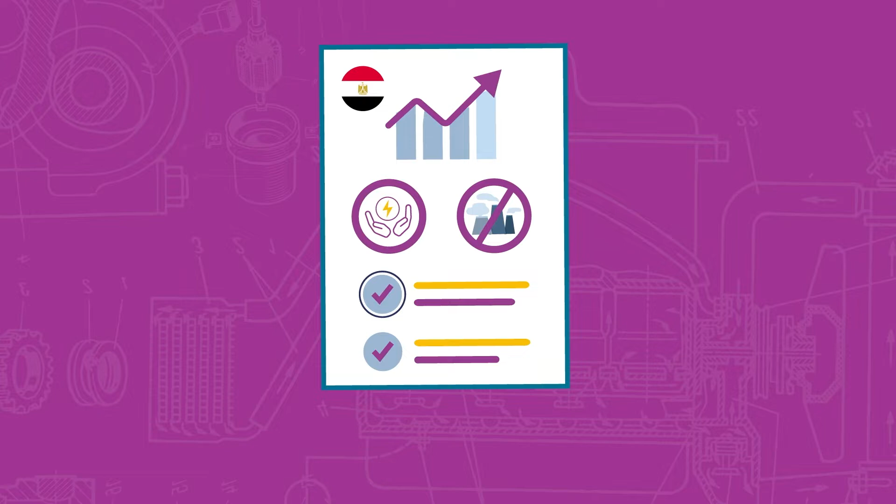Among the actions undertaken was when the Ministry of Trade and Industry issued the Ministerial Decree 463, issued year 2020, for enhancement of electric motors efficiency in industrial operations.

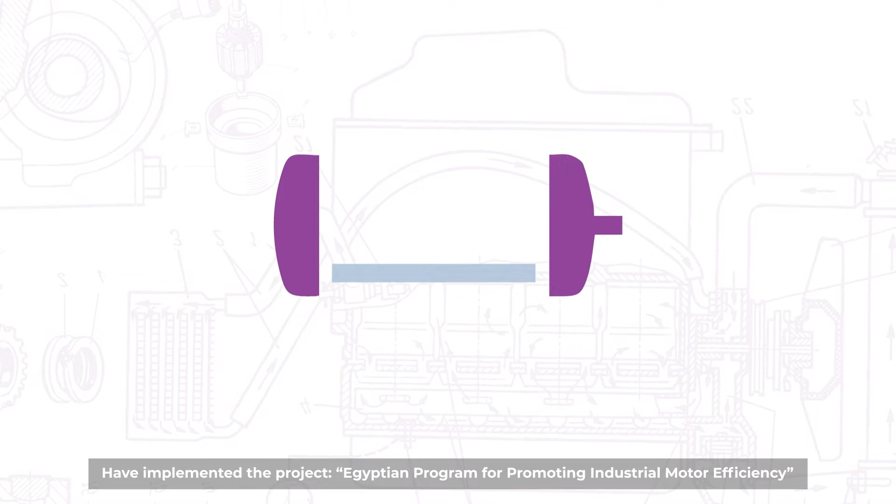Accordingly, the United Nations Industrial Development Organization, in cooperation with the Ministry of Trade and Industry, and with funding from the Global Environment Facility, have implemented the project Egyptian Program for Promoting Industrial Motor Efficiency, which facilitates the relevant decree issued by the Ministry of Trade and Industry and supports the Egyptian policies aiming to mitigate greenhouse gas emissions resulting from inefficient motors used in the industrial processes, especially that electric motor systems account for 70% of industrial electricity consumption worldwide, and enhancing their efficiency would save nearly 4% of the electricity consumption in Egypt.

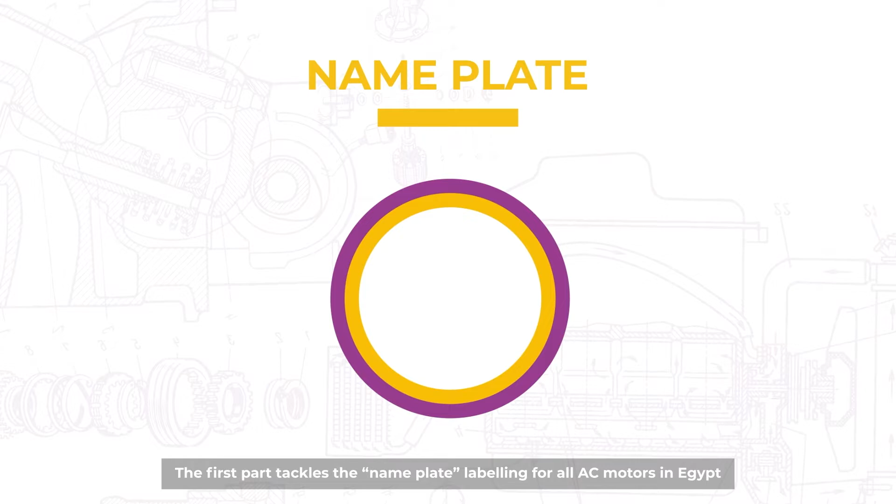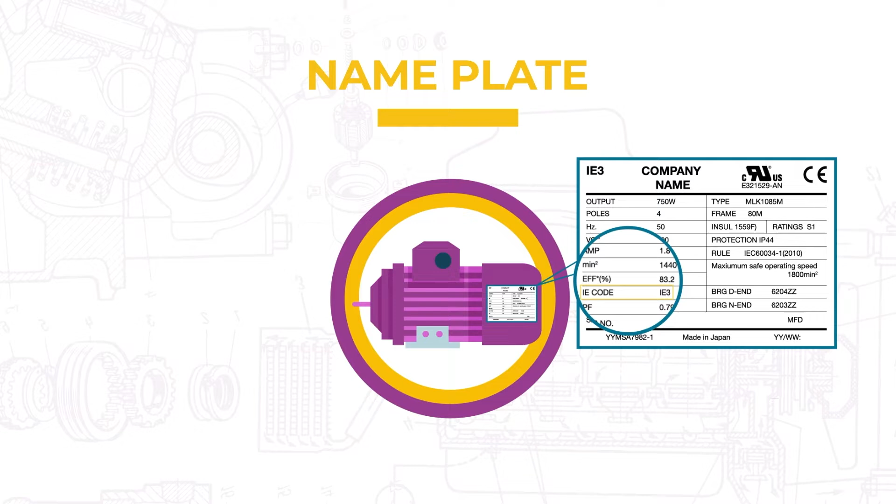The Ministerial Decree 463/2020 includes two segments. The first part tackles the nameplate labeling for all AC motors in Egypt, showing the degree of energy efficiency as per the Energy Efficiency Classification, IE code, and in relevance to the declared tables in the Egyptian standard.

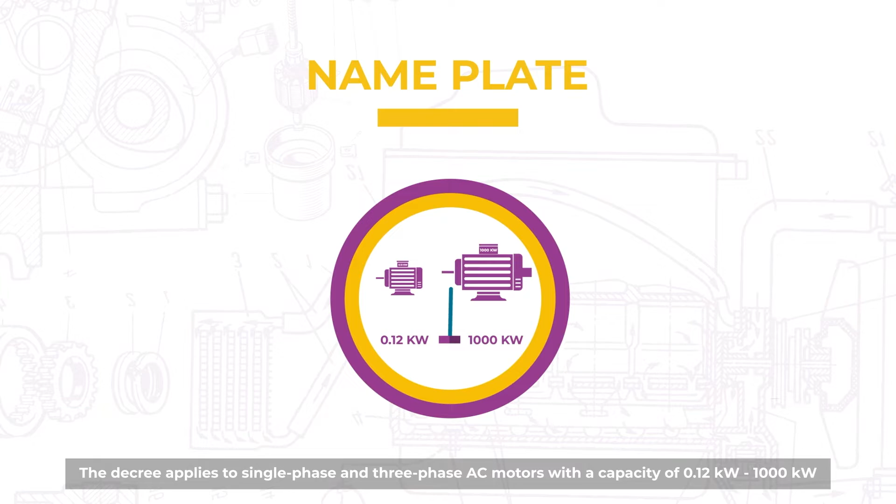The decree applies to single-phase and three-phase AC motors with a capacity of 0.12 kilowatts to 1,000 kilowatts, and with the characteristics specified in the decree, provided that the decree would apply to motors with the mentioned specifications within a maximum period of 6 months, starting the issuance date of the ministerial decree.

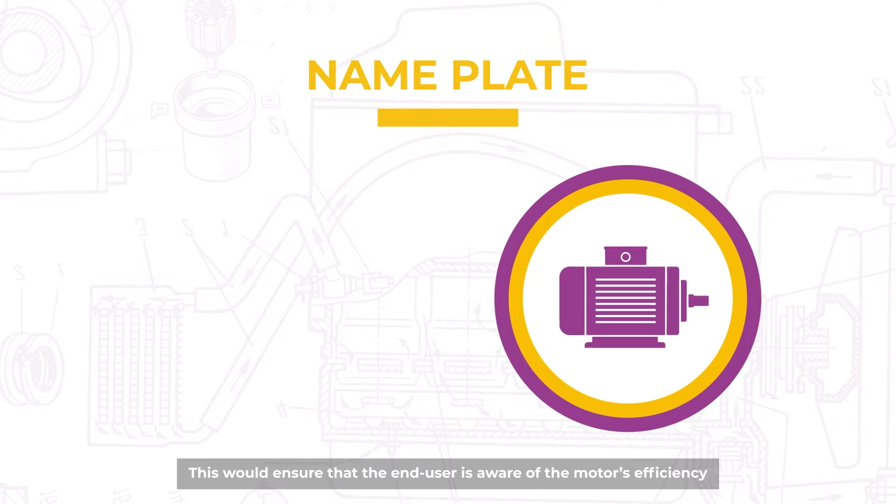This would ensure that the end user is aware of the motor's efficiency and selects the most appropriate motor to achieve the optimal savings in the end user's facility.

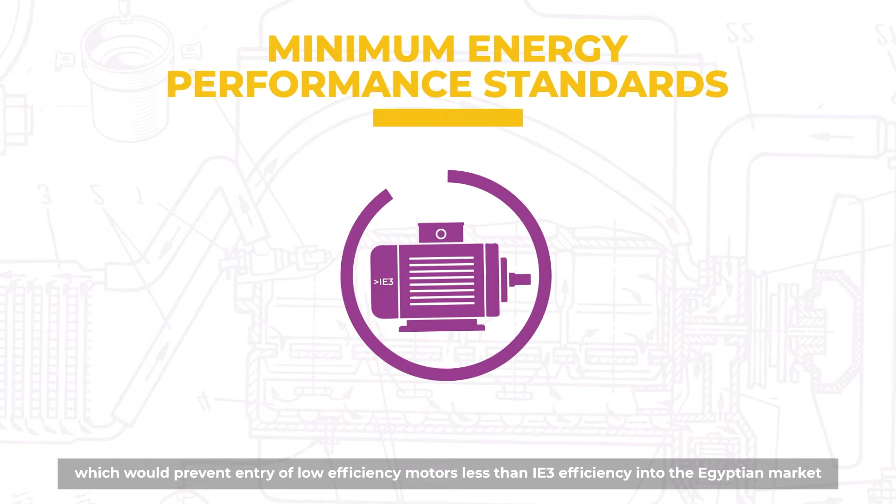The second part of the decree tackles applying the minimum energy performance standards, which would prevent entry of low-efficiency motor, less than IE3 efficiency, into the Egyptian market.

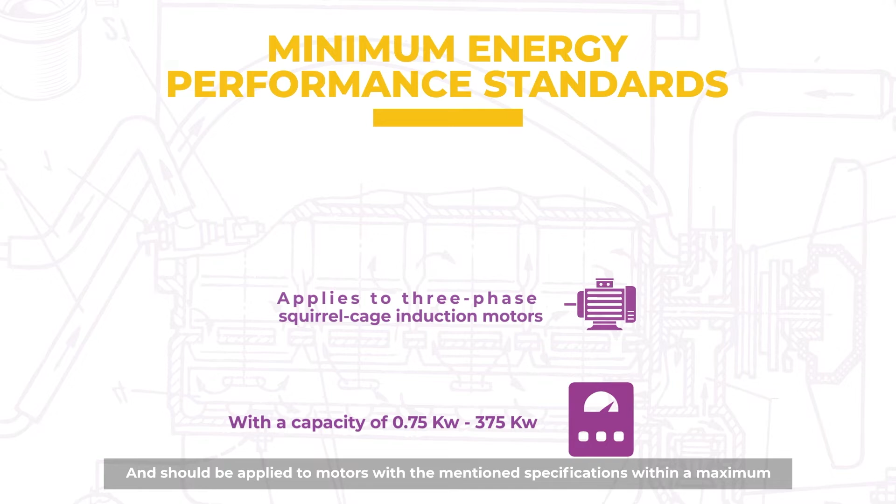The decree applies to three-phase squirrel cage induction motors with a capacity of 0.75 kilowatts to 375 kilowatts, and should be applied to motors with the mentioned specifications within a maximum period of 18 months, starting the issuance date of the ministerial decree.

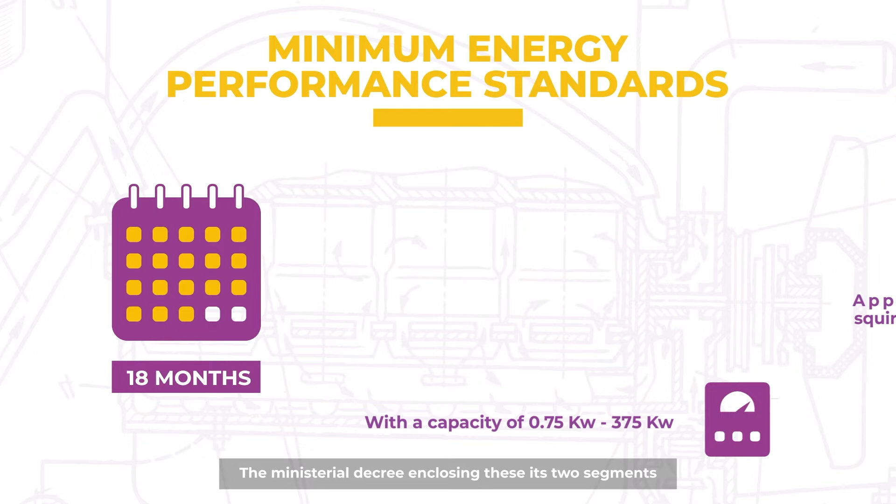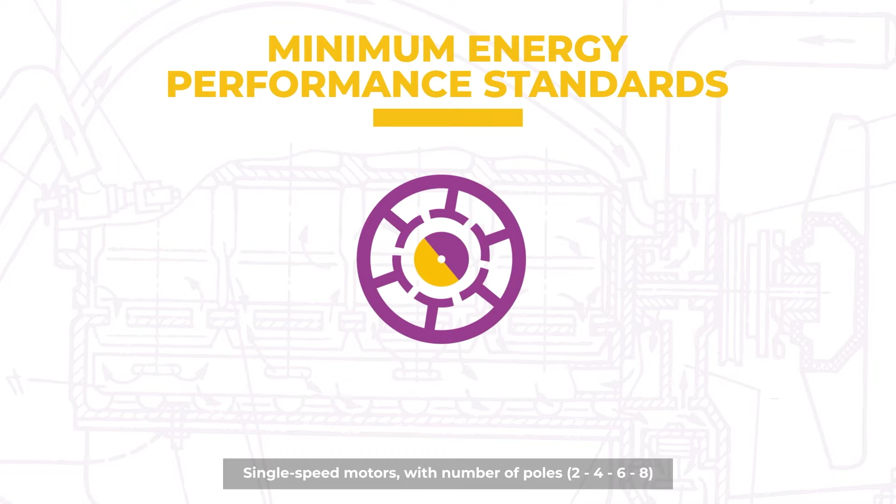The ministerial decree, enclosing these its two segments, applies its provisions on motors with voltage 50 volts to 1,000 volts and frequency 50-60 Hz, single-speed motors with number of poles 2, 4, 6, 8, and duty cycle S1, and direct online operated motors which are not connected to the equipment or machinery. Apart from that, motors are not subject to the provisions of this decree.

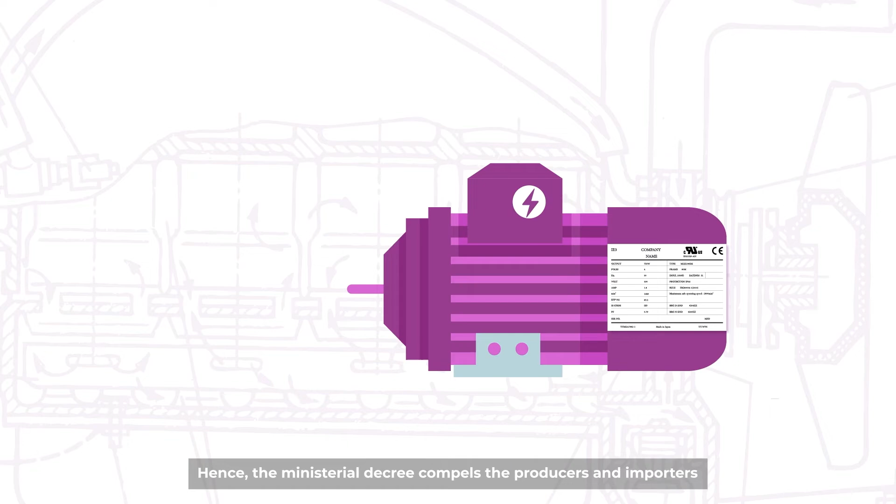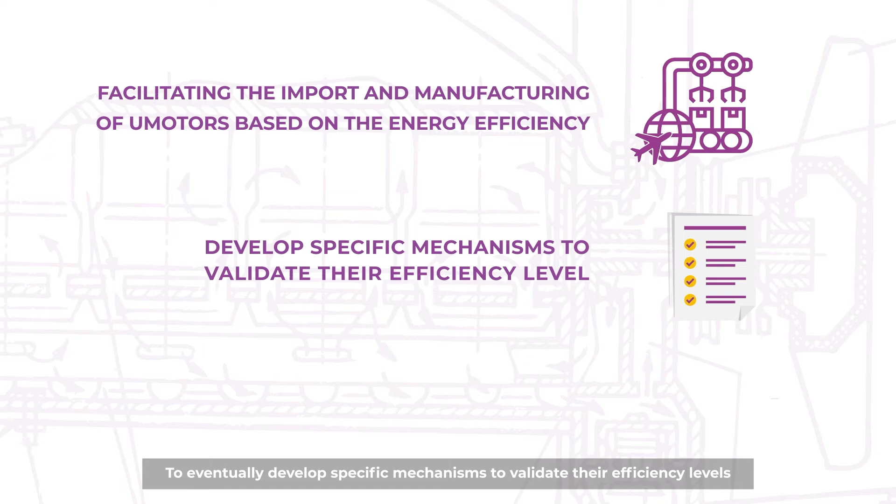Hence, the ministerial decree compels the producers and importers of electric motors to conform to the Egyptian standards, equivalent to that of the international standards for electric motors' energy levels, as well as facilitating the import and manufacturing of motors based on the energy efficiency to eventually develop specific mechanisms to validate their efficiency levels according to the Egyptian standards, or the equivalent accredited certificate emphasizing conformity with the energy efficiency level.

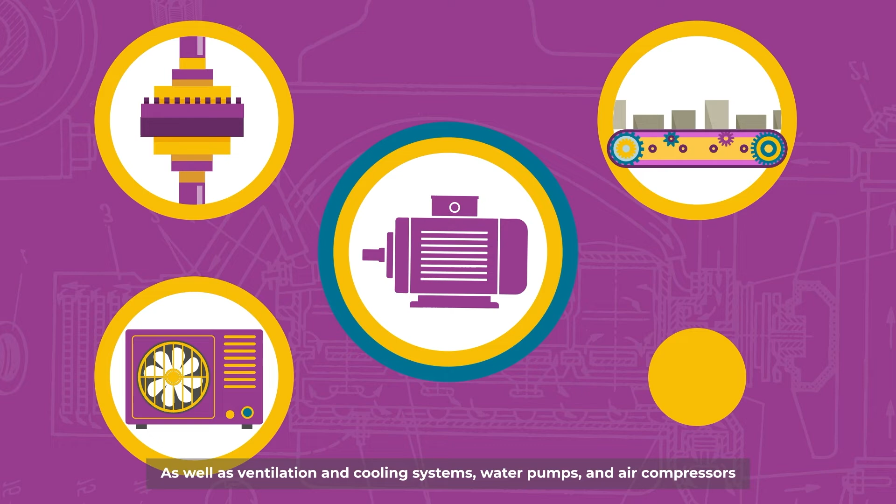Electric motors are used in many manufacturing processes, including compressing and moving materials, as well as ventilation and cooling systems, water pumps, and air compressors. Studies and practical experience show that there are great opportunities for developing energy optimization of electric motor systems, whether in developed or developing countries.

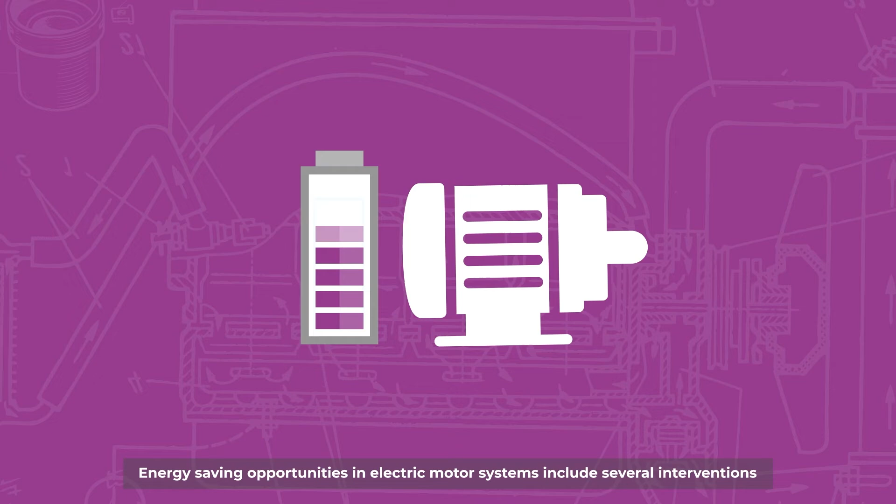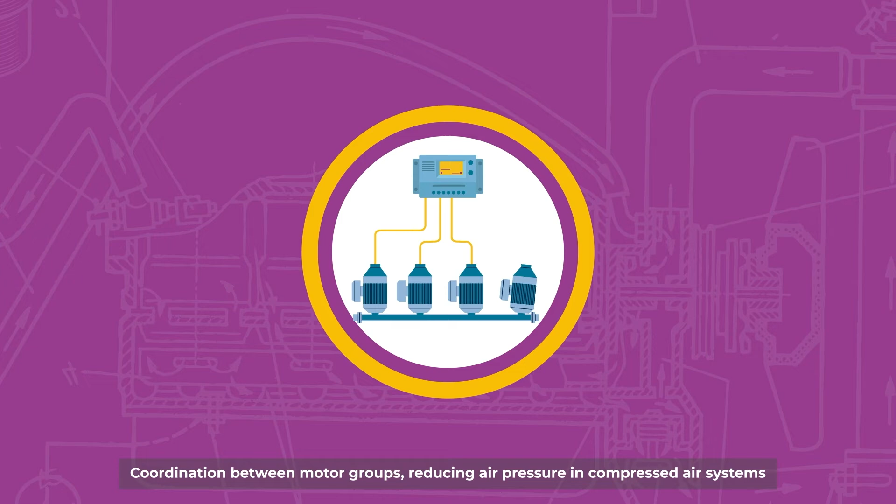Energy-saving opportunities in electric motor systems include several interventions, including optimizing coupling elements, maintaining a balanced voltage source, coordination between motor groups, reducing air pressure in compressed air systems, practicing good rewinding practices, using variable speed drives, proper motor sizing, and using high-efficiency motors.

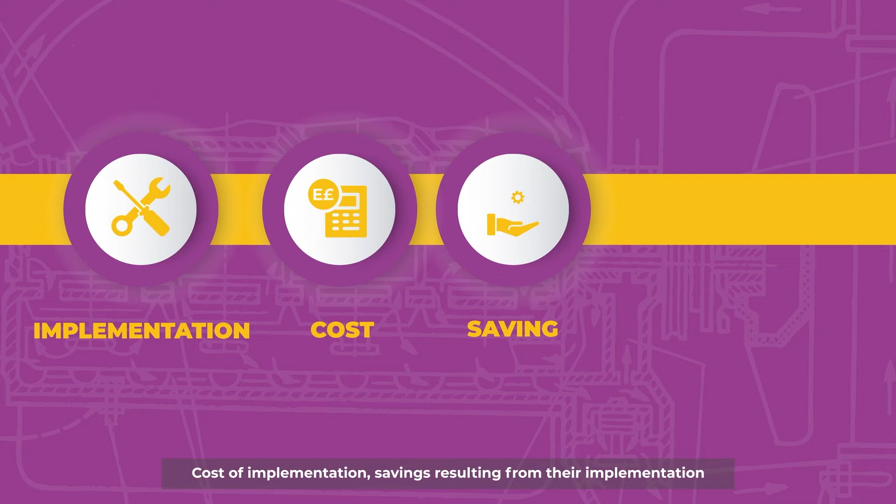These interventions are evaluated by different measures, such as ease of implementation, cost of implementation, savings resulting from their implementation, in addition to their prevalence in industrial facilities. The International Energy Agency

estimates the available savings in electric motor systems in the industrial sector to range between 20 to 30% of the consumed electricity, which could reduce global demand for electric energy by 10%.

However, from a realistic perspective, the International Energy Agency proposes a more achievable target for the International Action Plan, which is to improve electric motor systems optimization by 10% to 15%.

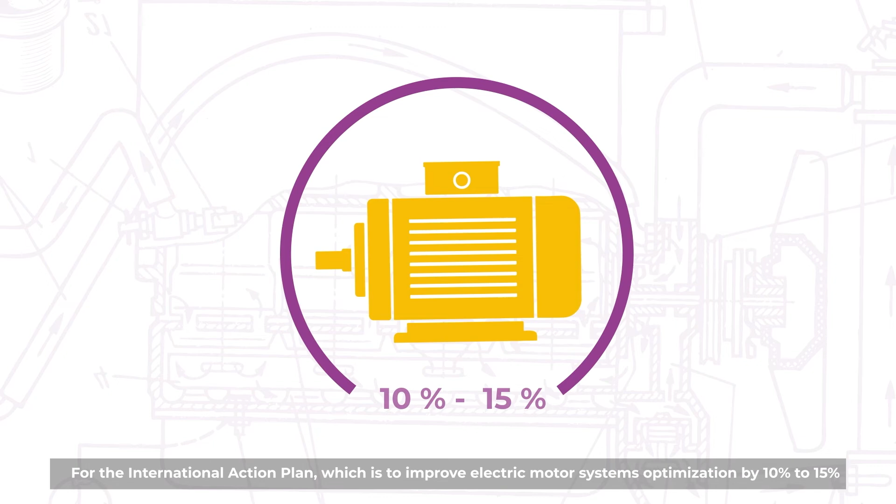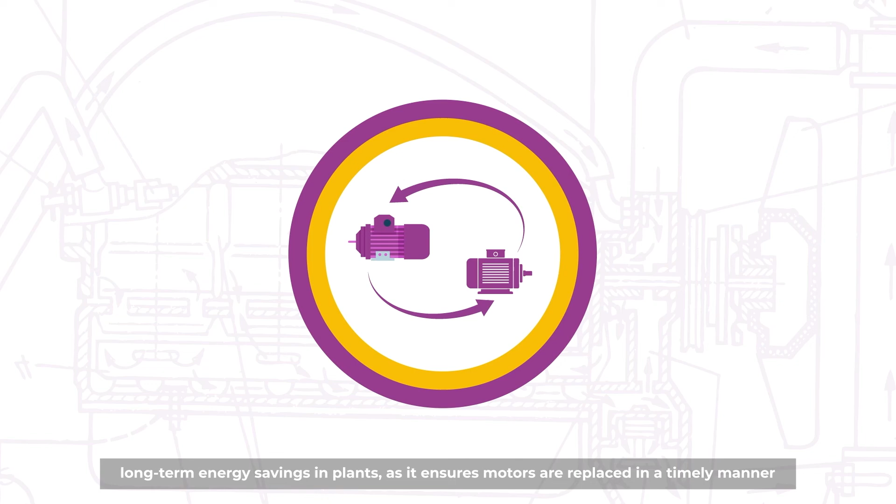Having a maintenance and motor replacement management plan could help achieve long-term energy savings in plants, as it ensures motors are replaced in a timely manner and maintained in an efficient manner.

Following up the motor's performance and up-to-date management plans include preventative and predictive maintenance procedures, which would ensure motors to operate continuously and avoid malfunctions that could hinder the production cycle.

In some cases, it may be better to repair the motor, rewinding it, when it encounters malfunctions, rather than buying a new one. When repairing or rewinding motors, it is important to follow motor rewinding best practices in order to minimize losses resulting from potential low efficiency.

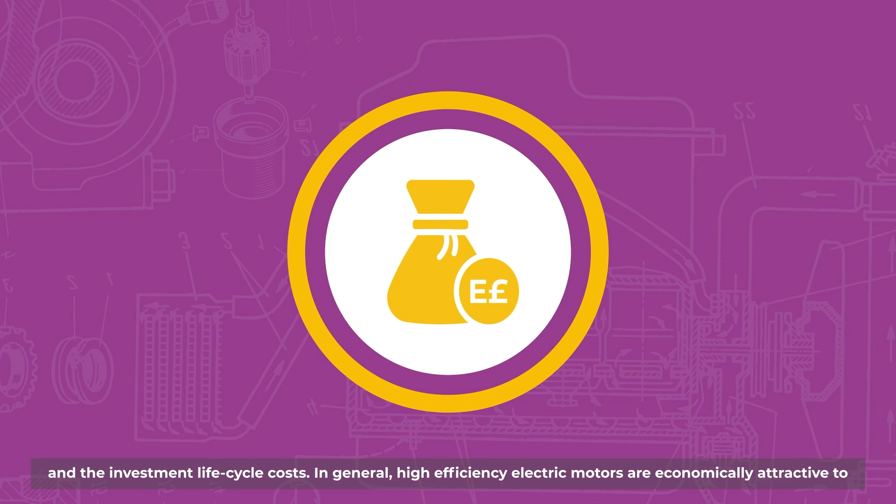The selection of high-efficiency electric motors depends on the motor operating conditions and the investment lifecycle costs. In general, high-efficiency electric motors are economically attractive to replace motors with more than 4,000 operating hours per year.

Often, replacing the motor with a more efficient one may have an excellent financial return compared to inexpensive and low-efficiency motors.